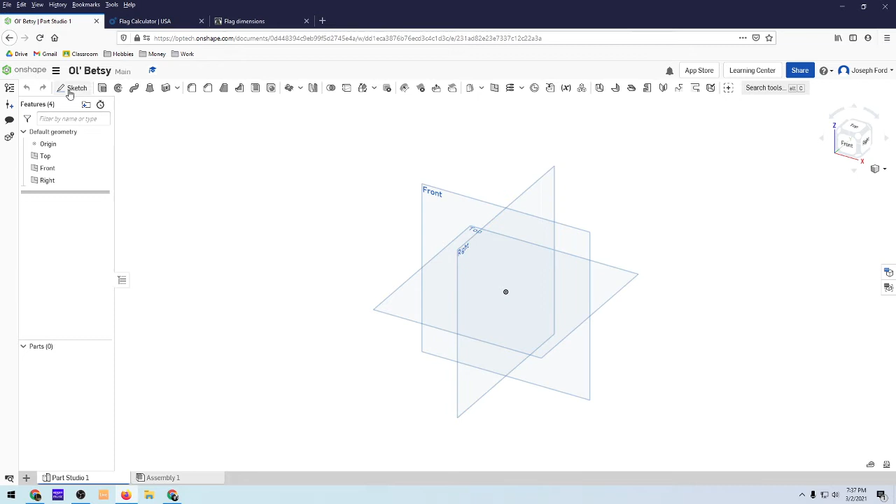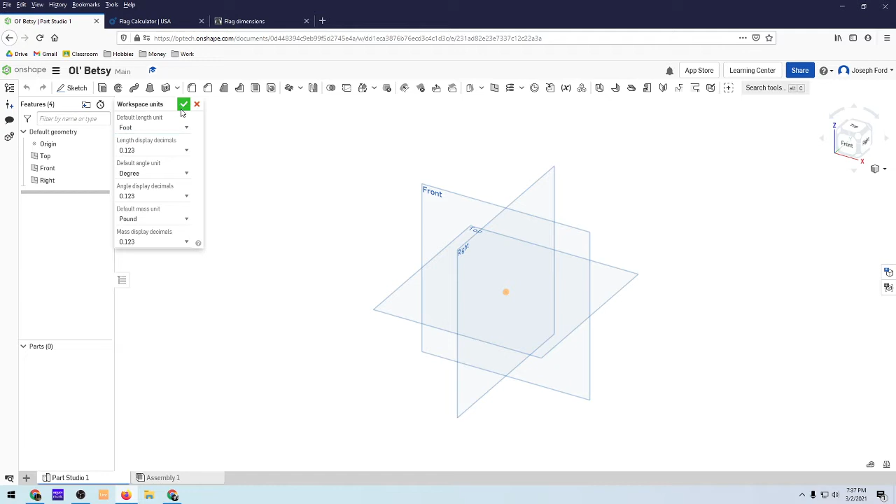Okay, so from here, first thing you want to do, because when you open up a part you're usually in inches, go up to document menu, workspace units, and we're going to use foot as the default length. Check it off. So now we're in feet.

So click on sketch, click on front, and then we're going to go normal to this sketch. You can hit the N key, or just click over here to front, and it'll bring us right in. The first thing we want to do is make a rectangle. Hit the hotkey R for a center point rectangle, which starts with the center, so we want to go right into the origin.

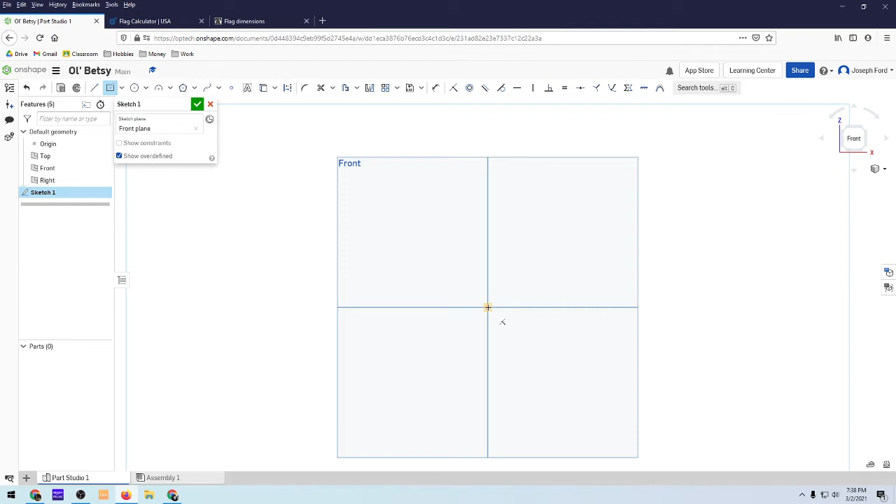Make sure that the origin has an orange box around it. Click on it, and then we're going to extend it out. The dimensions are going to be 20 by 38. So click on the D key for dimension. These are toggles, so you can click on and off. If it's on, I can dimension things. If it's off, I can't dimension anything.

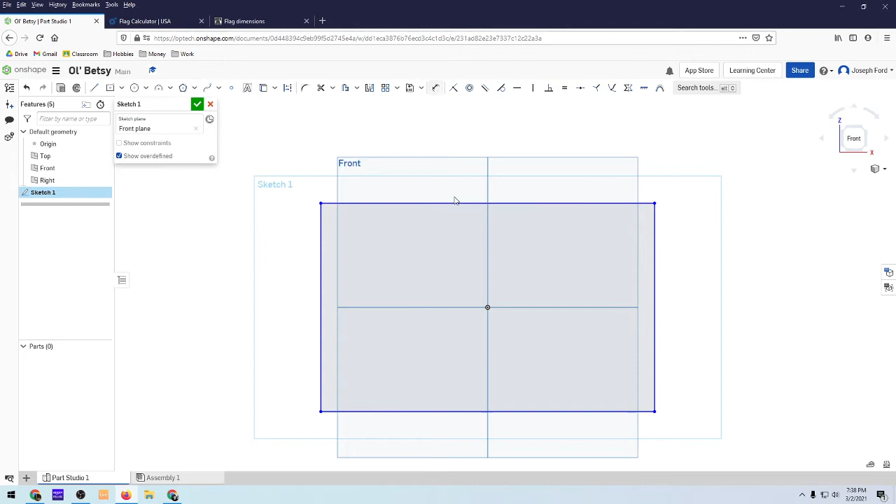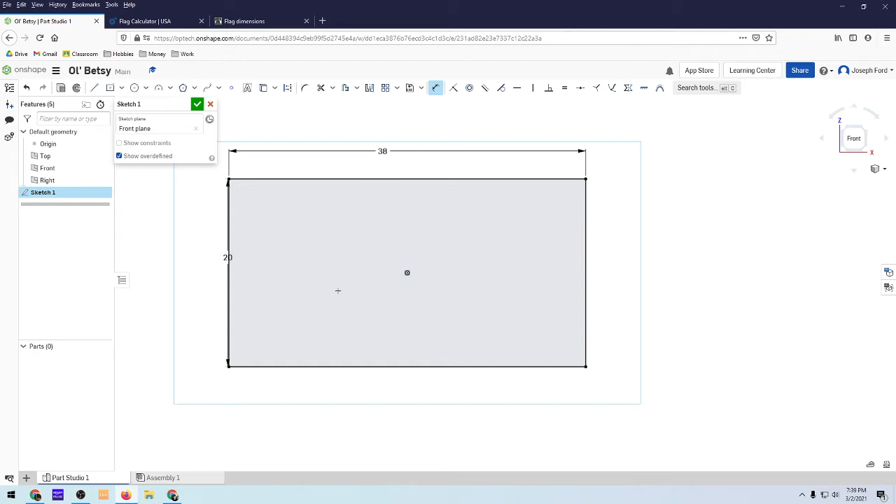So again, the hotkey is D, and it's going to be 20. Oops, and it looks like it's huge now. So zoom out, by 38. All right. So this is kind of where we're going to start.

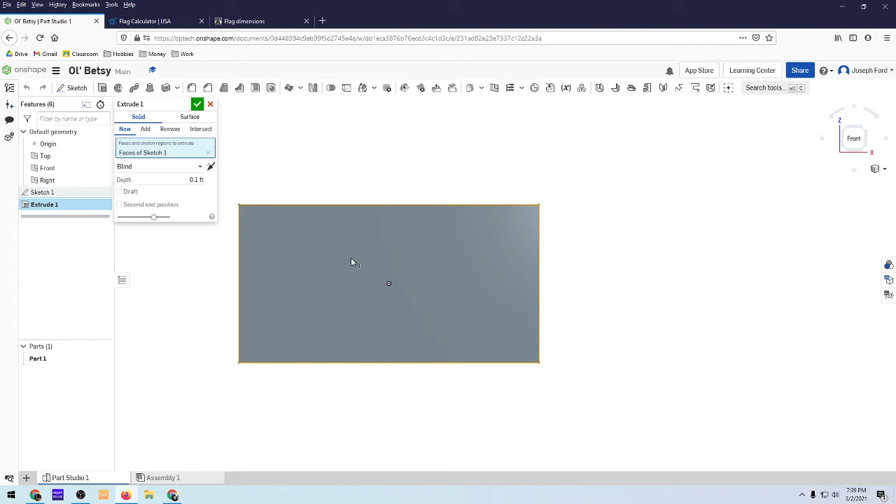So I'm going to extrude this out. Click on the extrude button. Whatever default depth is fine. 0.1 works, because we'll be building off of this. So 0.1, check. And now we can start with the blue space where all the stars are located.

So that's C by D. C is 10 feet 9 inches by 15 feet 2 inches. And so I'm going to click on sketch, and click on this here.

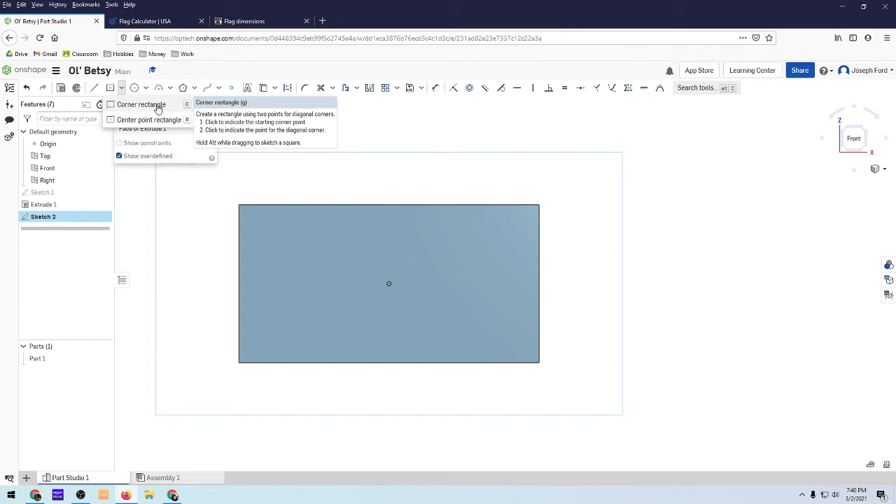And now I'm going to make a corner rectangle. To do that, I'll come over here where the center point rectangle is and click on this arrow. The corner point rectangle has a hotkey of G, so in the future you can just press G to trigger it. Click on it, and now it's opened up.

From here, I'm going to go to this corner, click it, and then come down and click it again. I don't have to worry about the feet, because I'm going to dimension that out. Again, it's 10 feet 9 inches by 15 feet 2 inches. So D key for dimension.

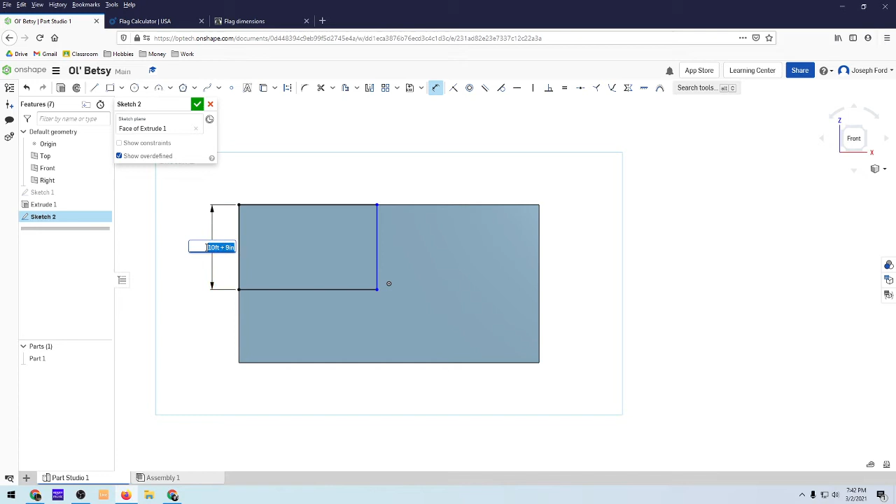Click over here, and 10 feet plus 9 inches. Okay, that's how you have to do it. So 10 feet and then plus the 9 inches. You have to use the addition symbol there.

And then dimension this one. I believe this was 15 feet plus 2 inches. Let me just check. 10 feet 9, 15, 2. Okay.

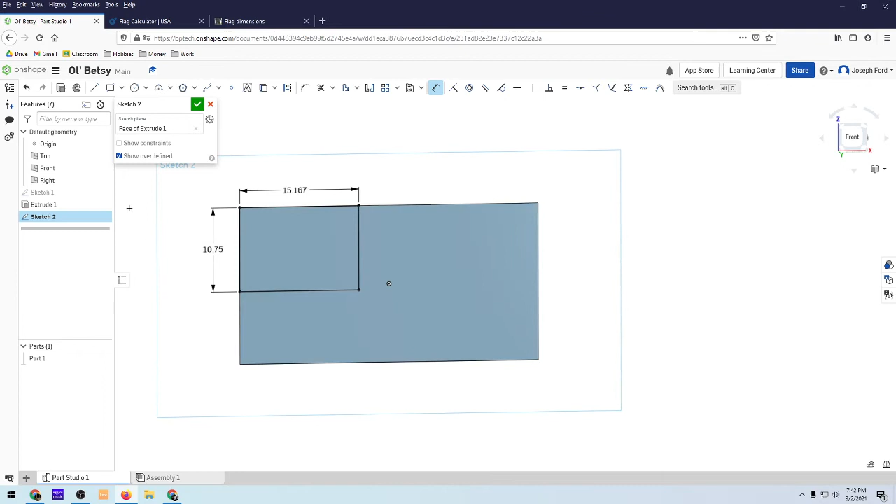Okay, so now I'm going to extrude this box up. Click on extrude. Again, the default is fine on this. Although what I may want to do is increase it a little bit, because I'm going to have some stripes that are going to be lifted up here.

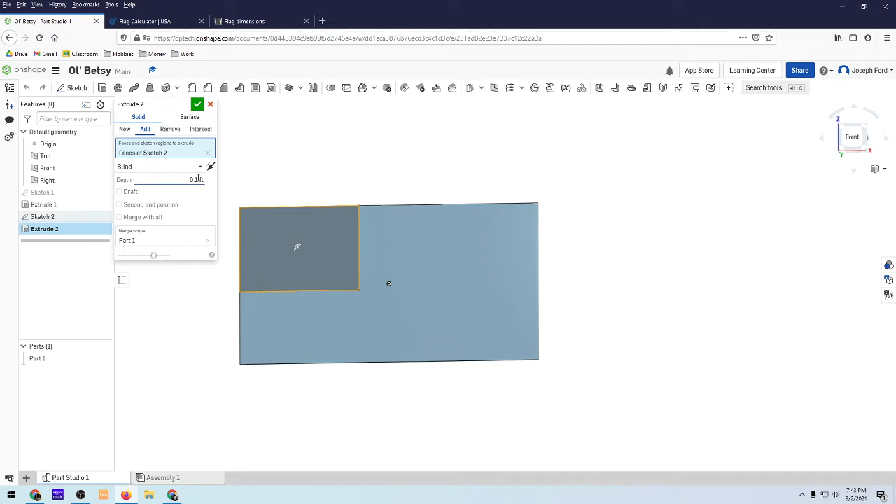Or no, they could be the same level, so that's fine. I'll just keep it 0.1. 0.1's fine. Check it off. All right, cool.

So now from here, I'm going to start putting in the stripes. So the stripes are going to be a bunch of rectangles, right? So I'm going to have 1, 2, 3, 4, 5, 6, 7 red stripes. Okay. And the width of those is 1 foot 6 inches.

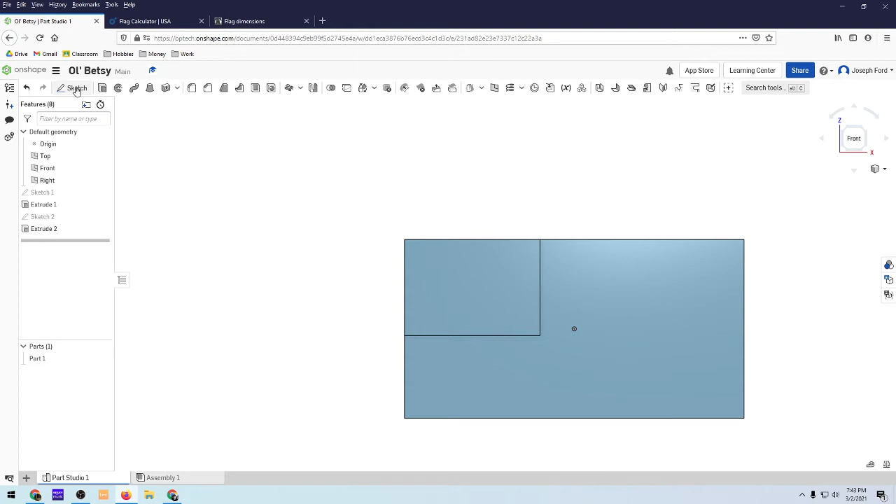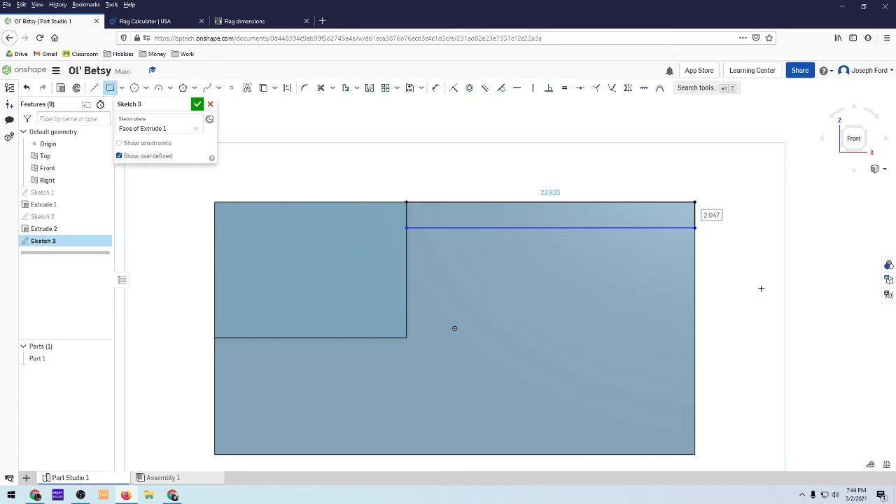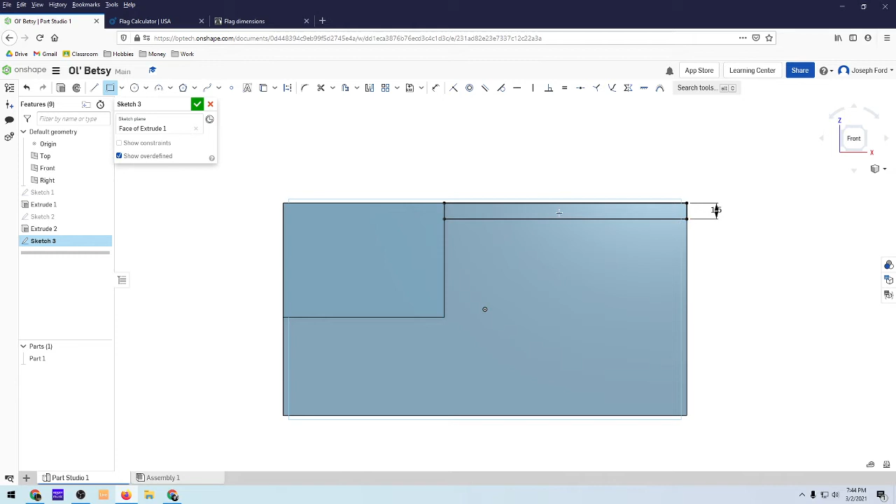So I'm gonna just create a sketch, click in here, and I'm gonna go back to that corner rectangle. So click on the corner rectangle, start at the corner here, and then I'm gonna go to this line there, and it is 1 foot 6 inches. Yes. So dimension this to 1 foot plus 6 inches. And then I'm going to create another one. But this time I'm not going right to here because these are going to be lifted up. I'm only doing the red stripes right now.

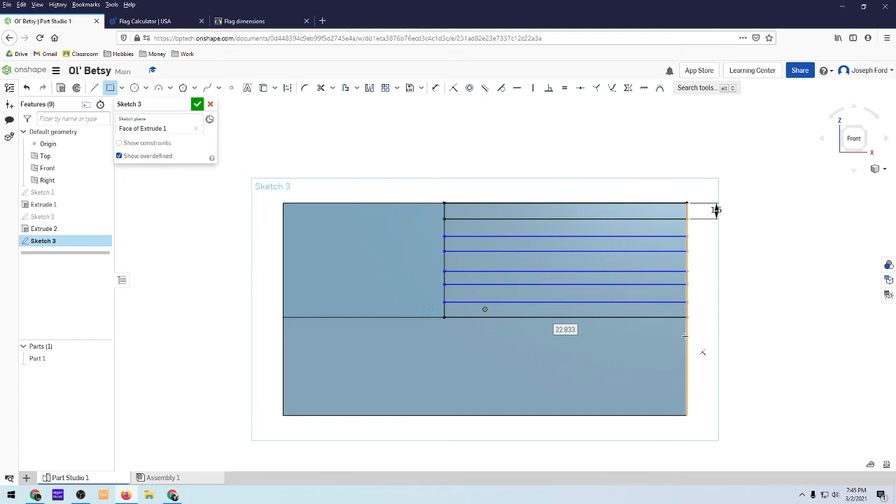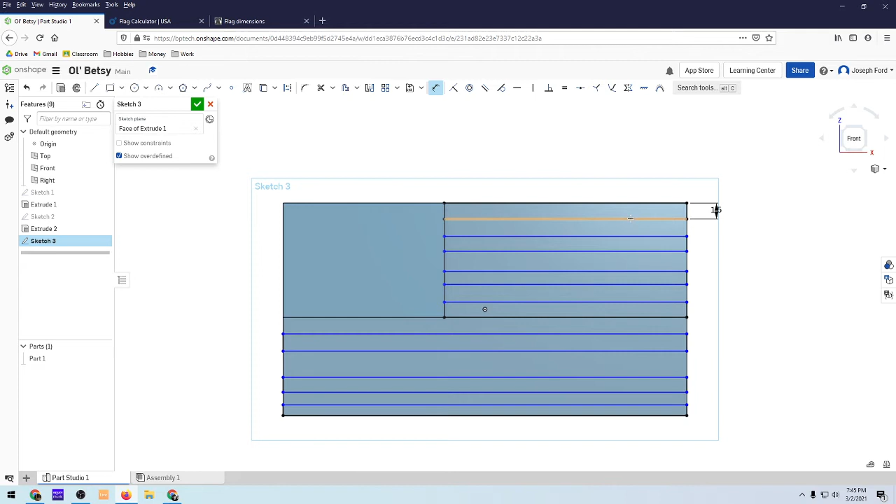One, 2, 3. Let me just check. Okay. 4. 5. 6. 7. And it's okay if they're not perfect right now, because we're going to make them perfect now. So dimension, and this is going to be, you guessed it, 1.5. So you could do the 1 foot plus 6 inches, but just as easy doing 1.5, right?

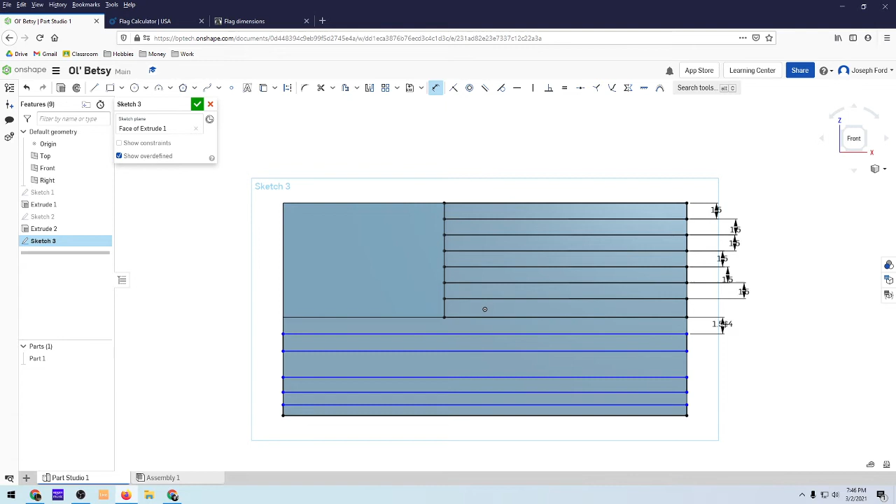1.5, and then I'm just going to keep going. 1.5. 1.5. This from here to here. 1.5. Here to here. 1.5. 1.5. Here to here. 1.5.

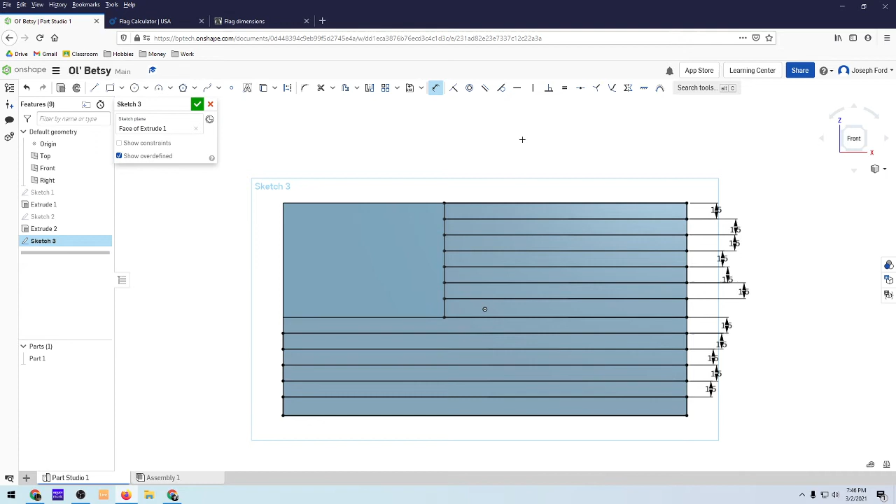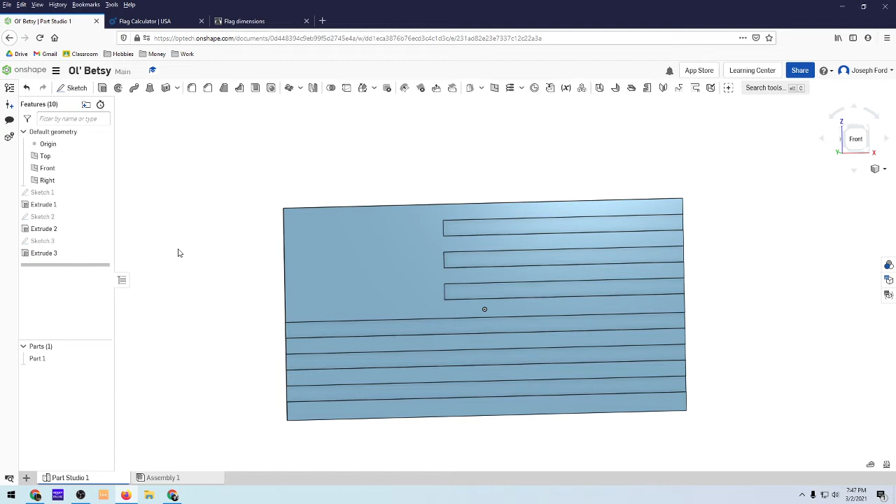1.5. All right, cool. So now once we have all of these, we can extrude these to 0.1 inches. And why does that look weird? Oh, that's why it looks weird. Okay, that's kind of what I was afraid of. Let's see. Yeah, that's what I was afraid of. Okay. All right, so we're gonna lift that up a little bit more than the blue square. So that's no harm, no foul. So double click back into your extrude, and I'm just gonna lift that up a tiny bit more. So 0.15. So that will create the separation that we need for that blue square.

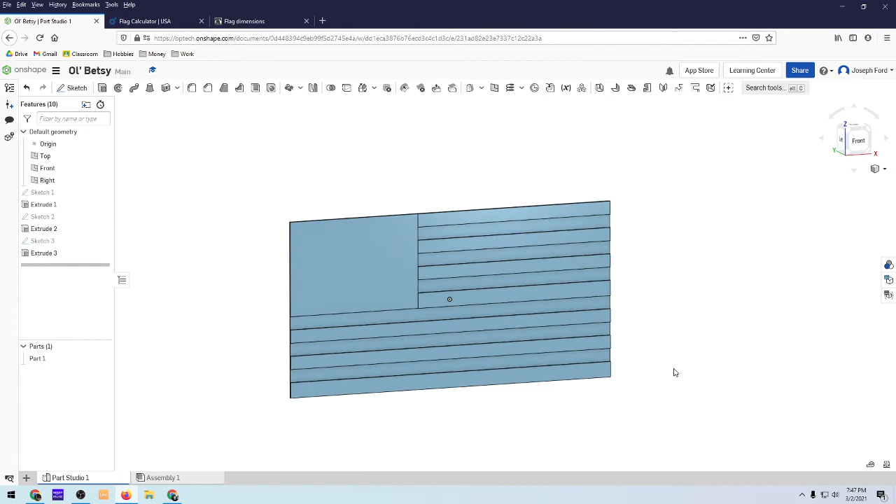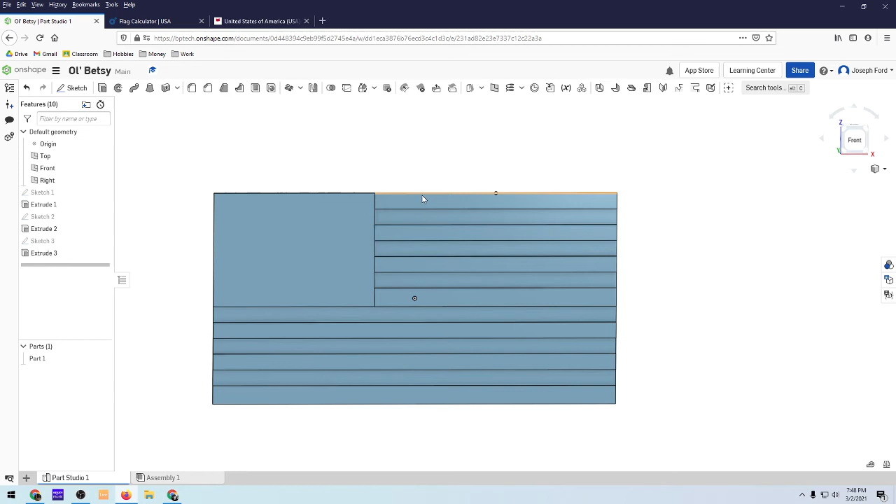So now we can start adding some color a little bit, just to have it start looking like a flag. So to get the exact colors of the flag, why not do that? So USA flag RGB. Okay, cool. So here we go. Yeah, let's try that. Let's see. Cool. Okay. So the hex numbers are here. So let's do that. So red, copy that, and so I'm gonna right click on extrude, add appearance to feature, and then double click down there, Control V, and check it off. So that's my red.

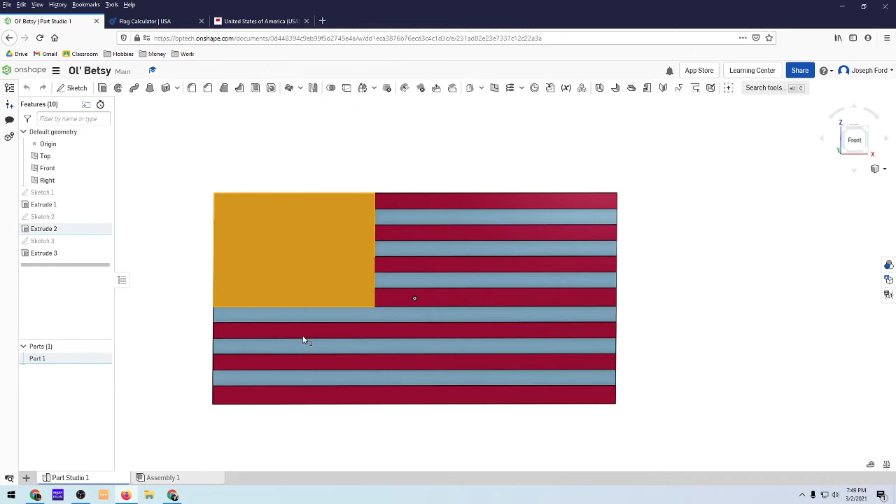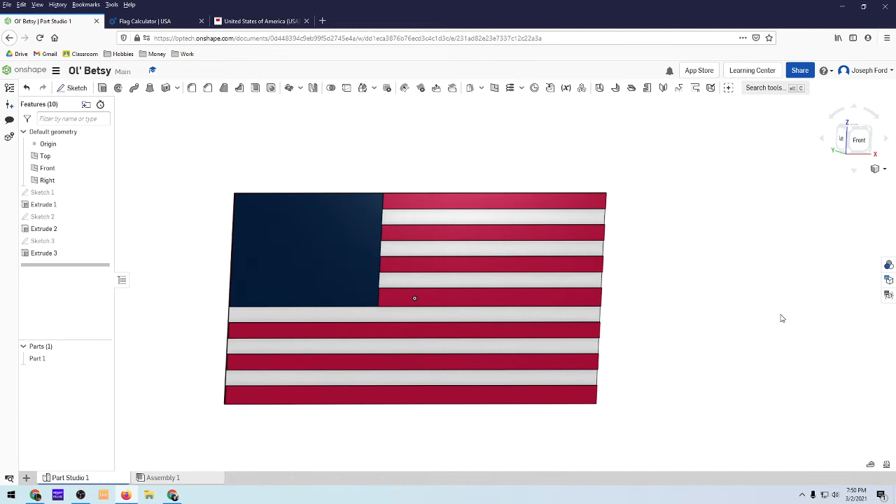Now I'm going to right click on this face, add appearance to face, go look up my blue, which is 041E42. Check that off, and then all of these, so add appearance to face, that's going to be FFFFF. And that wasn't right. I need 6 Fs. 1, 2, 3, 4, 5, 6. Check it off. All right. And then, oops. So right click on that, edit face appearance, and then you can actually go in and click these two to get all of them to be that white color. Very cool. So we're starting to look like a flag.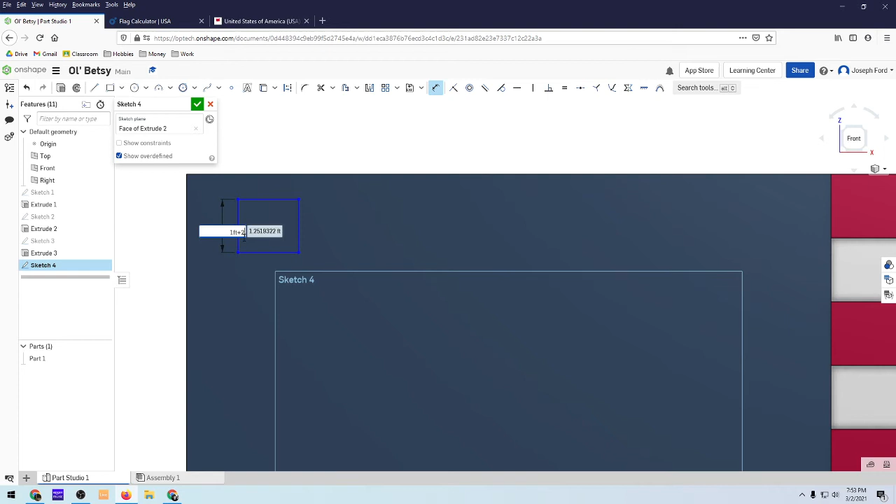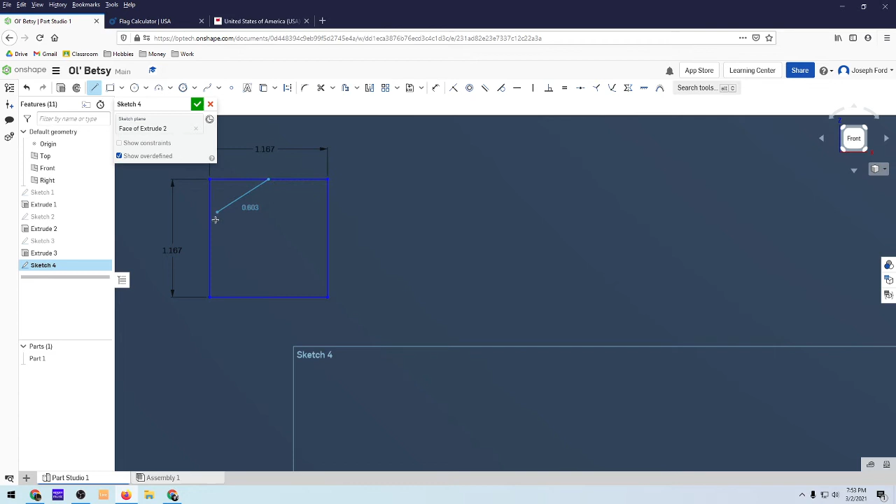So we know the square is 1 foot 2 inches, right? All right, so we're going to make a square. And it's going to be dimensioned, 1 foot plus 2 inches, 1 foot plus 2 inches. Okay, and we're gonna create a star. So from here, okay, we want it to be symmetrical.

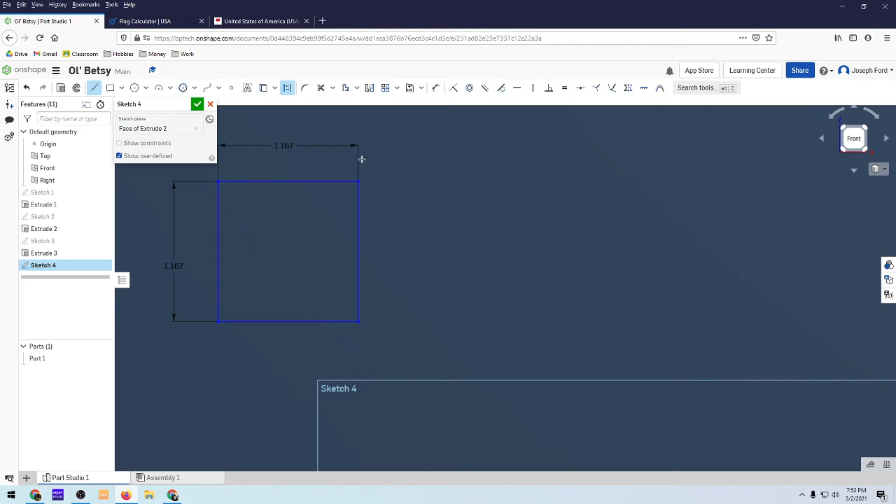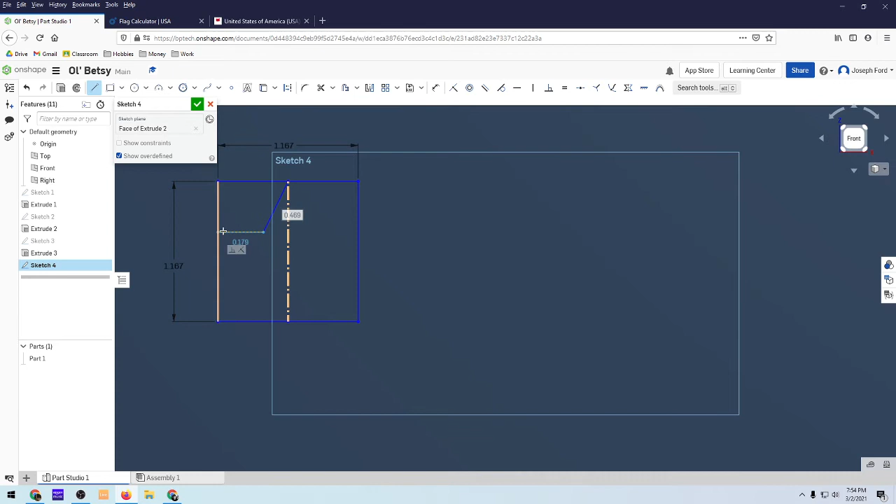So I'm going to create a line. So hit the L key, line, and then hit Q for construction. So L and then Q. And now we're going to go from the middle to the middle. Hit escape. So from here we're gonna create a star. So click on the line again, and now I'm gonna go here, make a horizontal line. Connect the dots there.

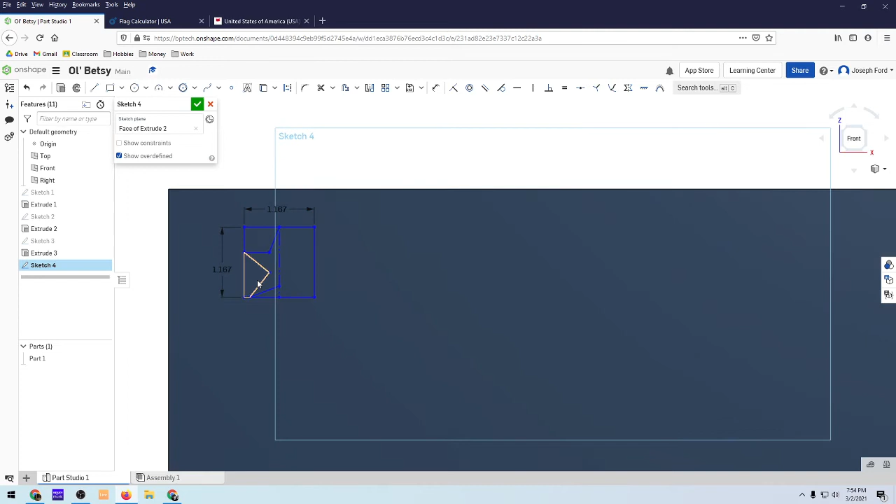Is that too much? That might be too much, yeah. All right, and then hit escape. So you might want to play around with this a little bit. Bring it in, bring it out, whatever you want to do. Again, it's not going to be perfect.

It'll be good enough. So with this, we're going to mirror it. Click on the mirror command. We're going to select this line, and then we're going to select all these entities.

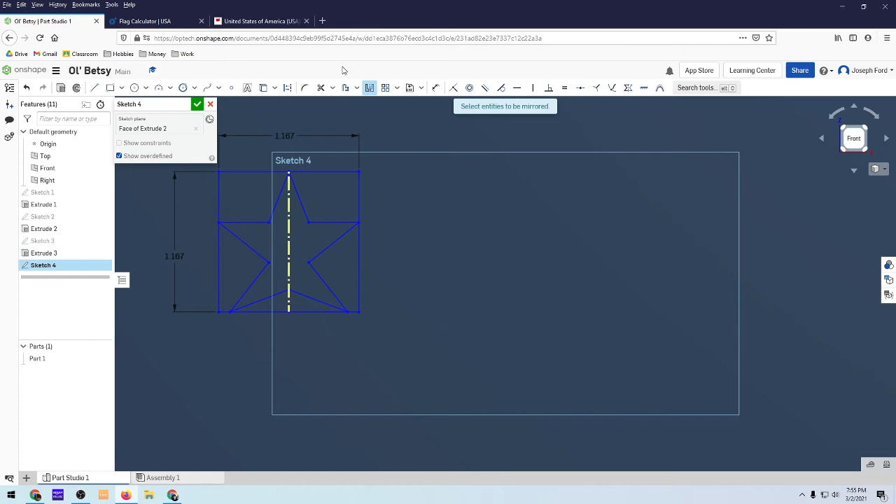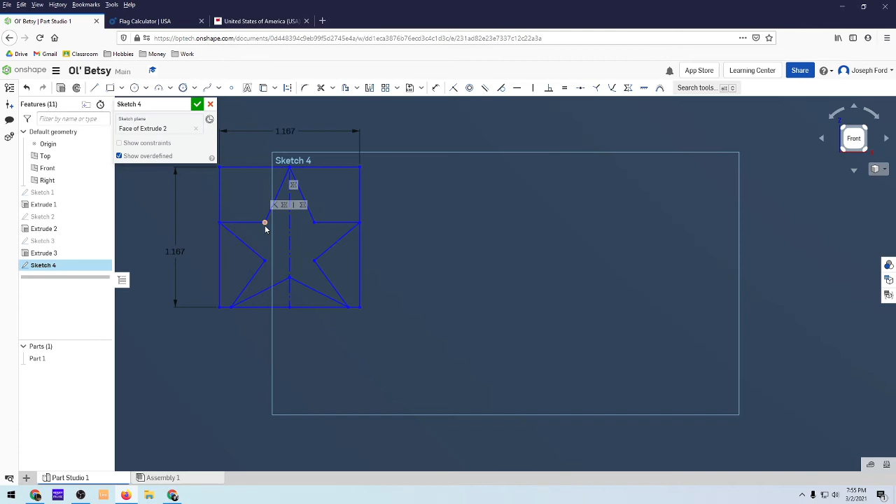And if that looks weird, which it kind of does, click out of the mirror. And then if you move this up, notice it also moves that up. So why does that look so weird? So kind of play around with it. That looks a little better. That doesn't look better. That looks like a tub star. Okay, all right, I'm gonna say that's as good as we're gonna get here.

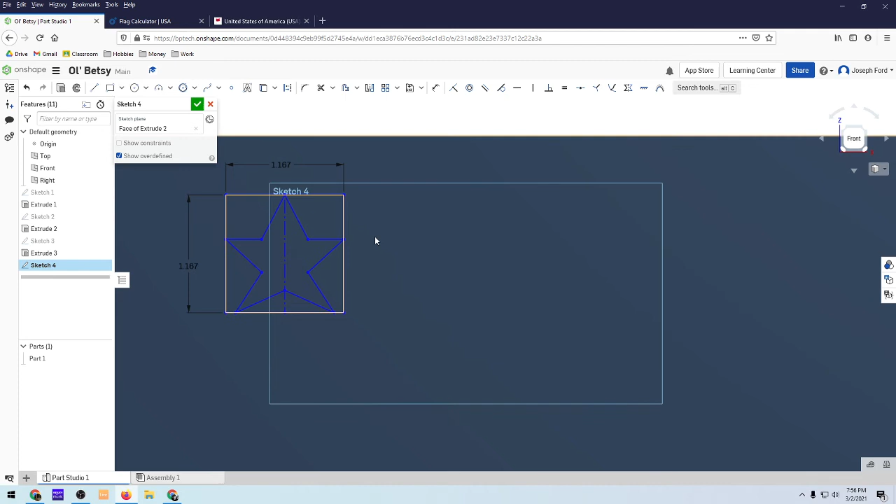All right, so now that we have one star, we have to make 50. So to do that, and to make your life easier, there's 1, 2, 3, 4, 5, 6, and then 1, 2, 3, 4, 5.

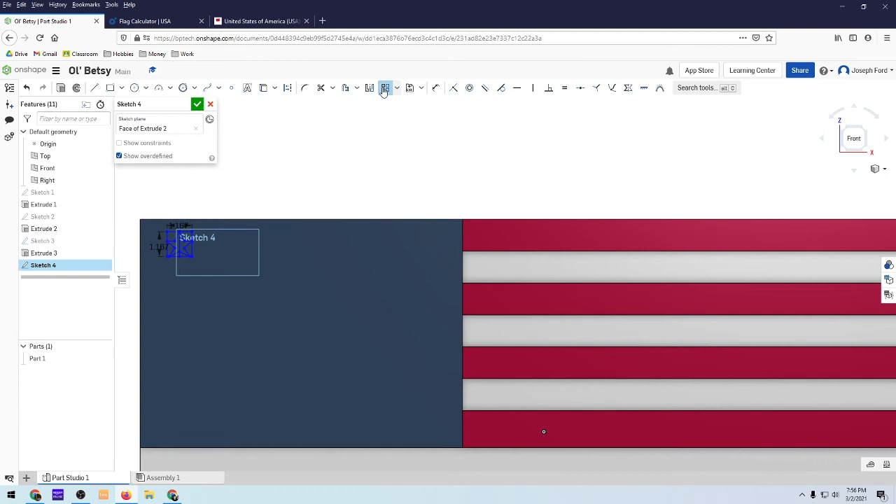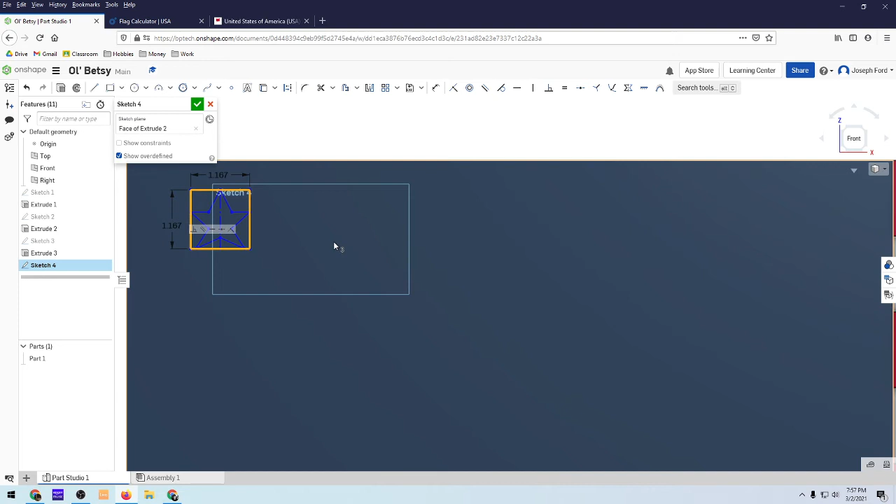So there's 6 on the top, and we're going to create a pattern, a linear pattern. So click over there for linear pattern, and then I'm going to select everything. Actually, before I do that, click on these - click on your square. Click on the hotkey Q. Now those are construction. Good.

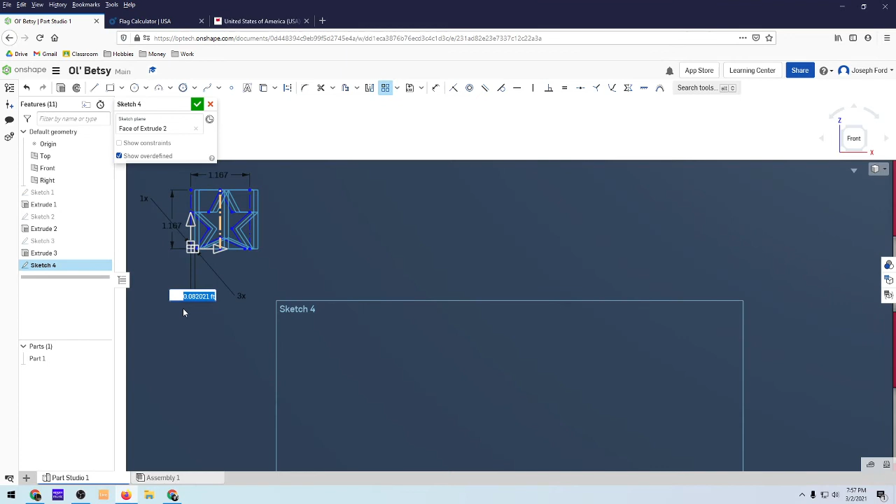Click on linear pattern, and then box in that whole thing. From here, we're going to go back to that dimension, which is F, F, F, F, F, but F is going to be times 2. So it's going to be 2 feet 6 inches, so 2.5. And there are 6. And we're good.

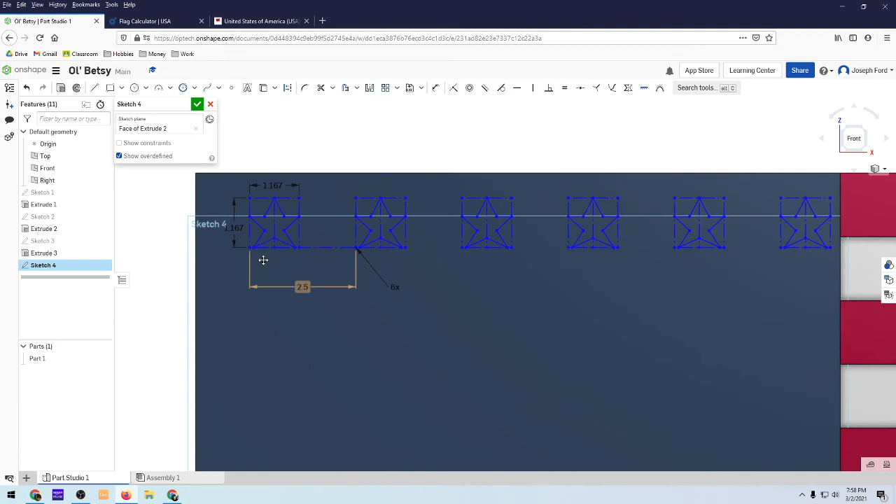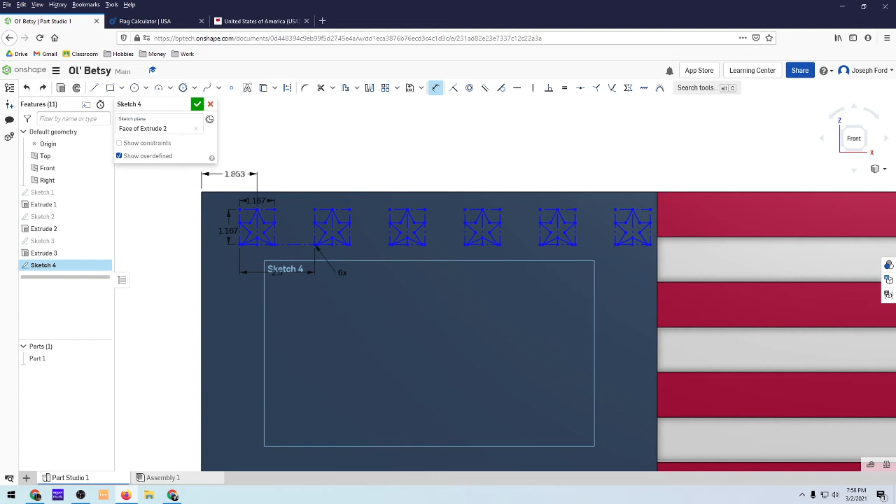Cool, so all right, so now we're going to kind of move this over though. Whoa, didn't want to do that. Okay, all right, so select all of it. Or wait. All right, so dimension from here to here is 1 foot plus 3 inches.

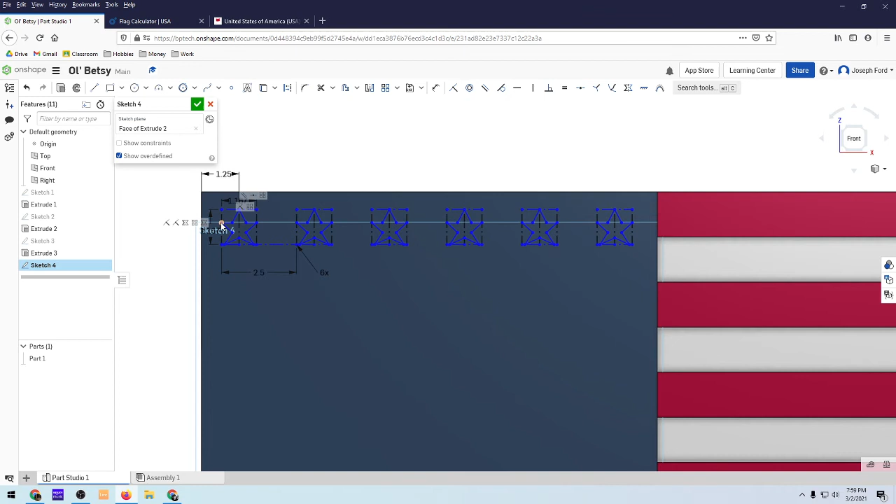And what about the top? It doesn't really tell you. I would assume it would be E, I hope. But I'm not certain, because it looks like it makes the dimension from down below. Okay, so that's fine, we'll just do that. So dimension this point to the bottom here, that is E, which is 1 foot exactly.

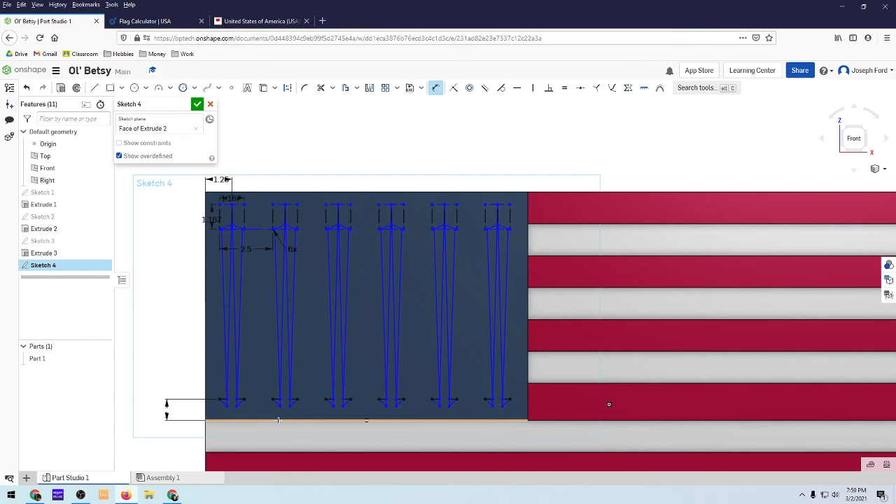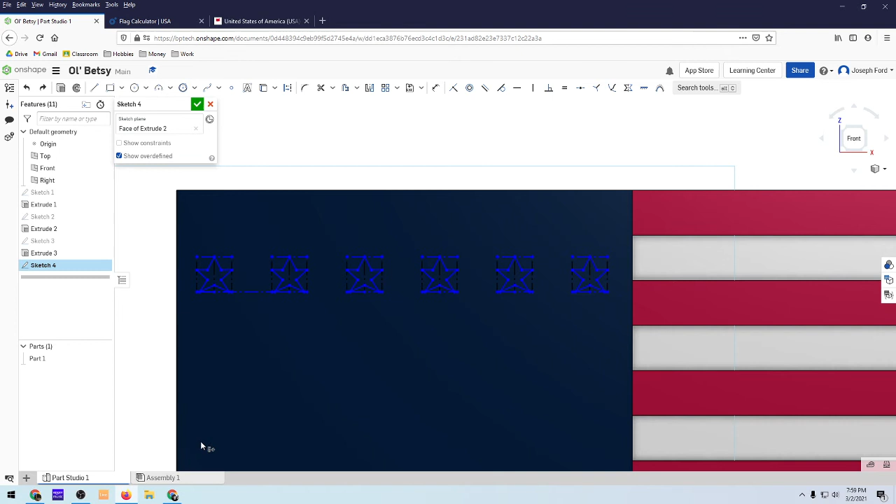Oh no, okay, that is not what we want. Yeah, let's try to move all of these downward. Okay cool, that's a little better. All right, keep moving it down. And now it won't let us. Why? All right.

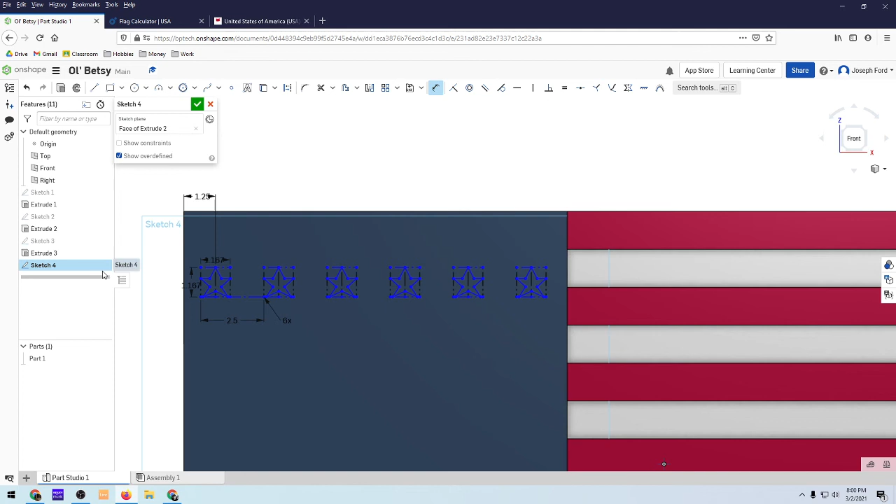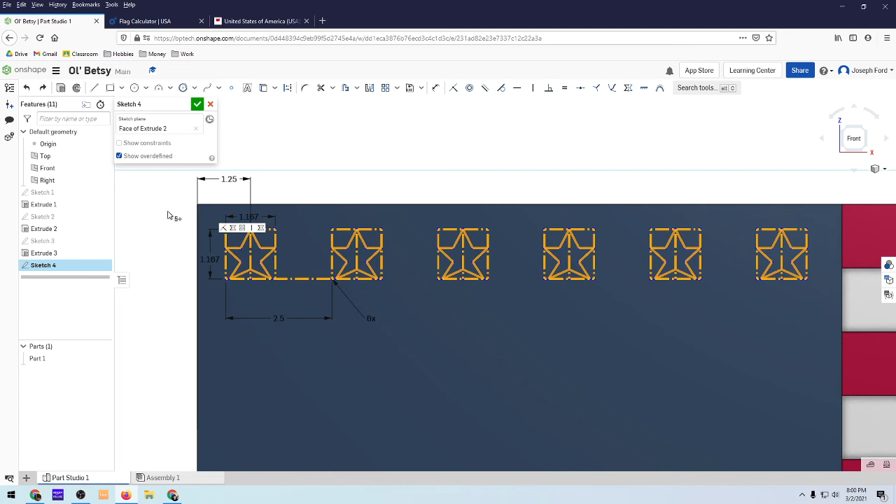Okay, we're just gonna keep it as is. We're just gonna move this up a little bit. If it lets us, and it won't. I'm trying to click and drag here, but it won't let us. All right, well, we're gonna call it as it is. It's fine.

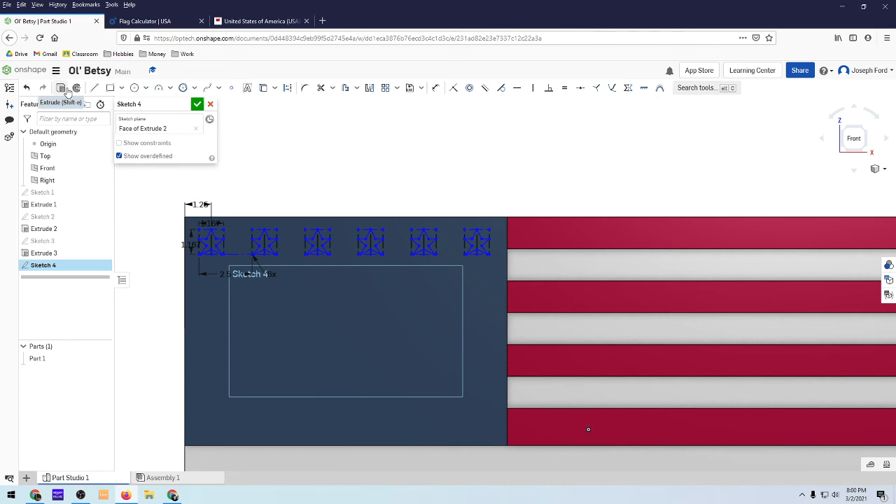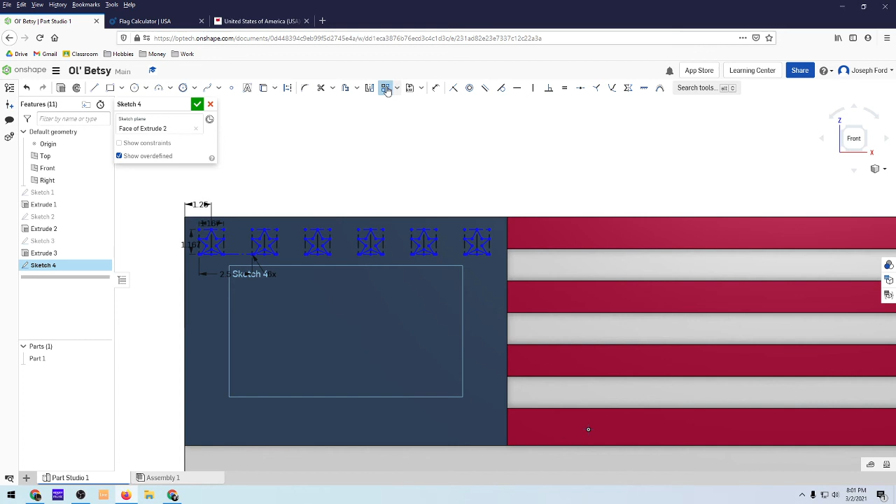So from there, we have how many of those? We have 1, 2, 3, 4, 5. So we need to make 1, 2, 3, 4 more of those. So let's go back to the linear pattern, and we're going to select all of these.

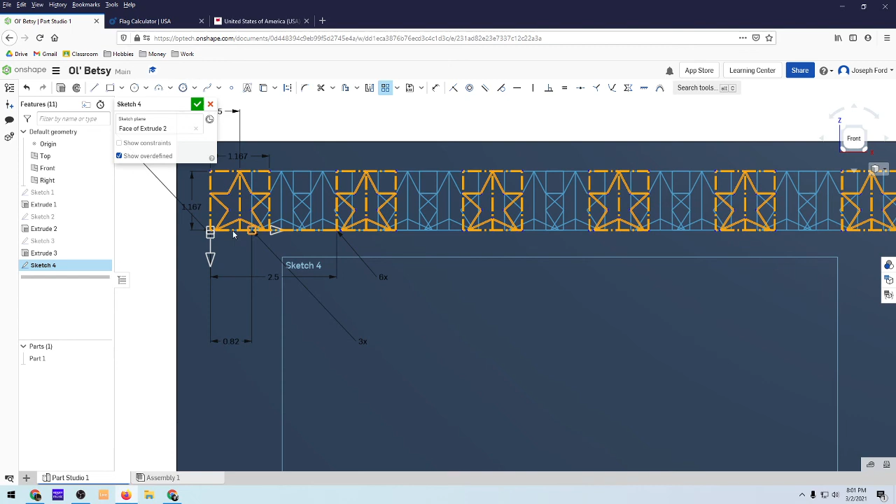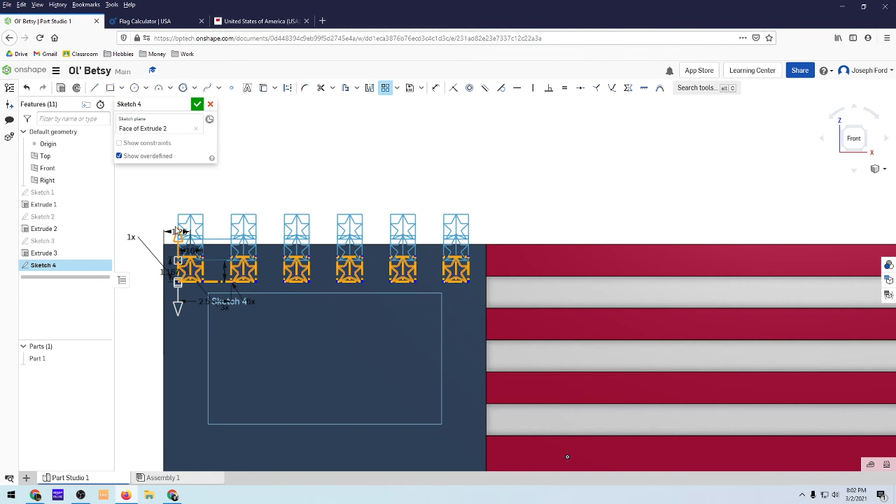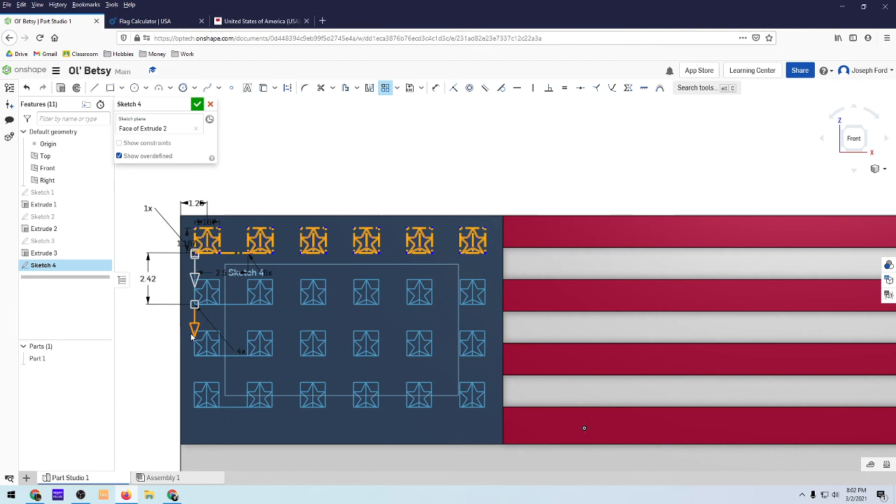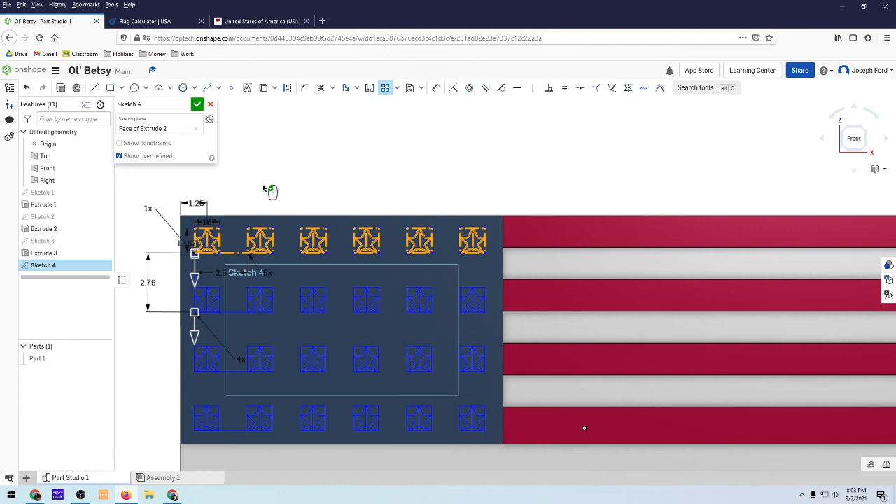You know what, we're gonna do this kinda not perfect, but perfect enough. I'm just dragging it around here. Okay, so at this point, if you are lost with this whole star thing, I suggest you come into the Google Meet and ask me some questions, because this is tricky. This is the tricky part. You could do circles, you could do something easier. This is kind of tricky. Okay, so click outside. And we're good, okay.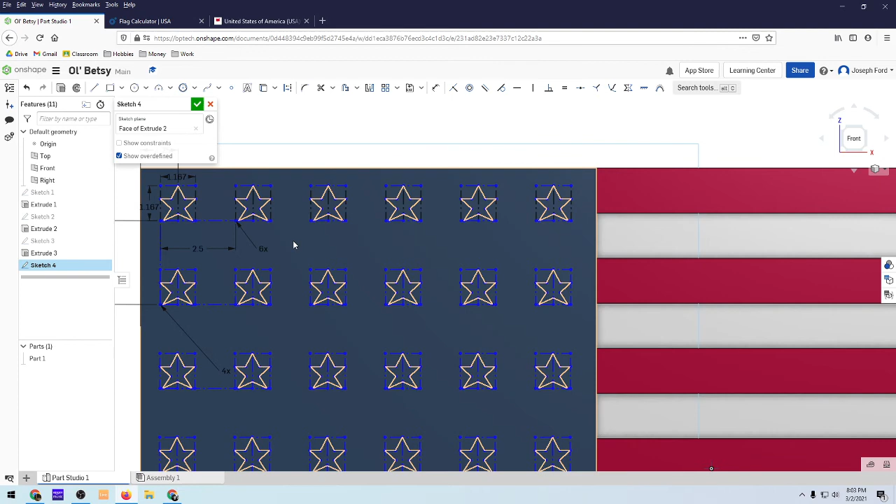So now we have to create some more stars, and we need to create the ones in the middle. So 1, 2, 3, 4. Okay, so they're going to go here. 1, 2, 3, 4, 5.

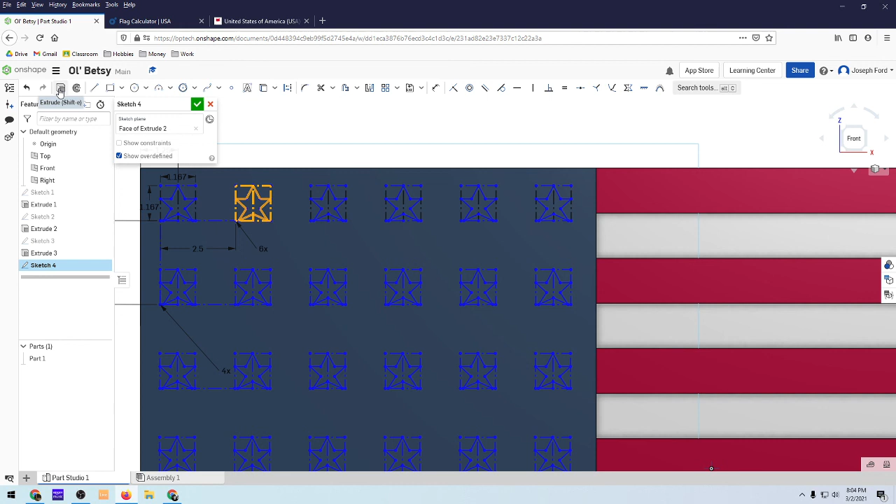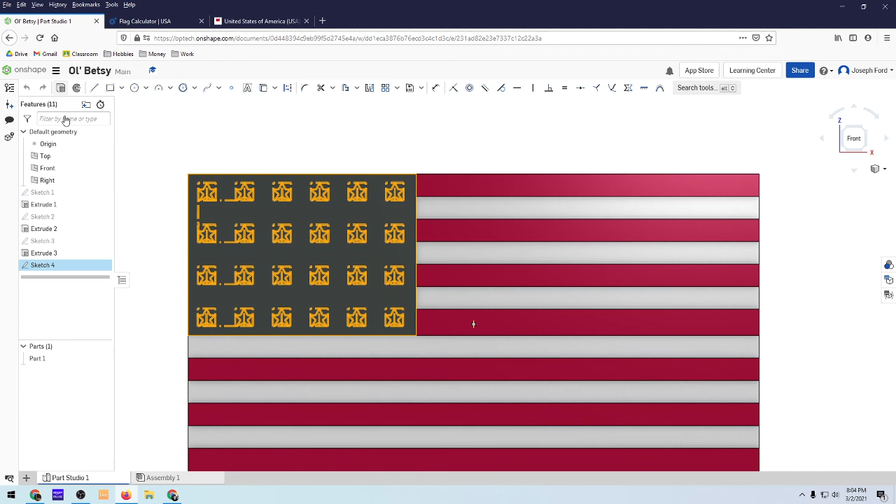I'm going to copy this, so Control C to copy it. But I'm gonna save it for another sketch, so that's fine, because we got a lot going on in this sketch. So what I'm going to do is hit the extrude key. So double click on extrude and then click on extrude. And 0.1's good.

So that's pretty cool. And now I'm going to go into another sketch, click on this again, and I'm going to hit Control V, and that's bringing in that star that I just dropped. Why is it doing this? Okay, click on this arrow, move it over. All right.

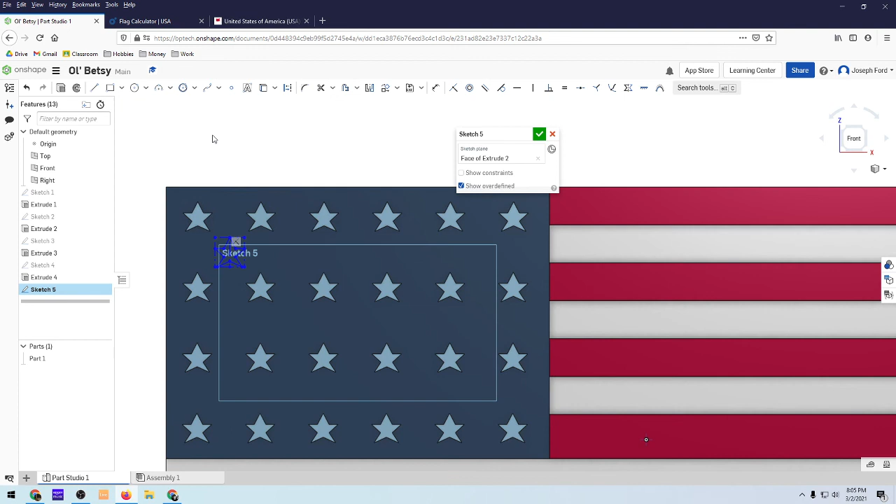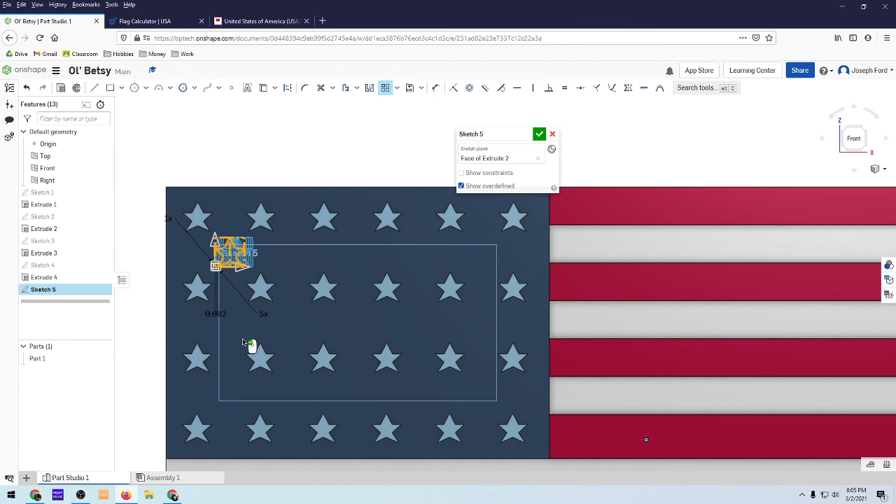Okay, so now I am going to do the same thing as I did before, right? I'm going to create a pattern. So highlight those, create a pattern. Where's the pattern? There we are. Linear pattern, and this is going to be 5 times. And they are going to be 1 - what was it again? 1, 3, yes, 1, oops.

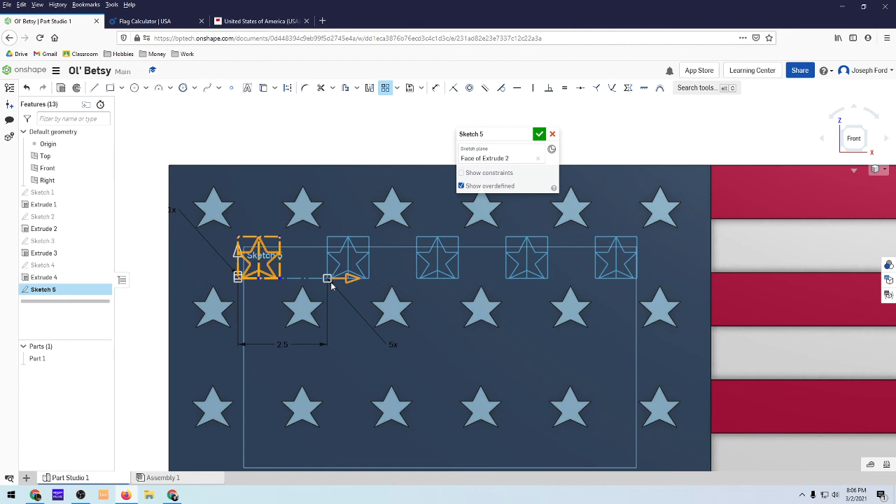1 foot plus 3 inches. And that's not right, it's 2 feet. I did this before, and 2.5 feet. And that looks beautiful.

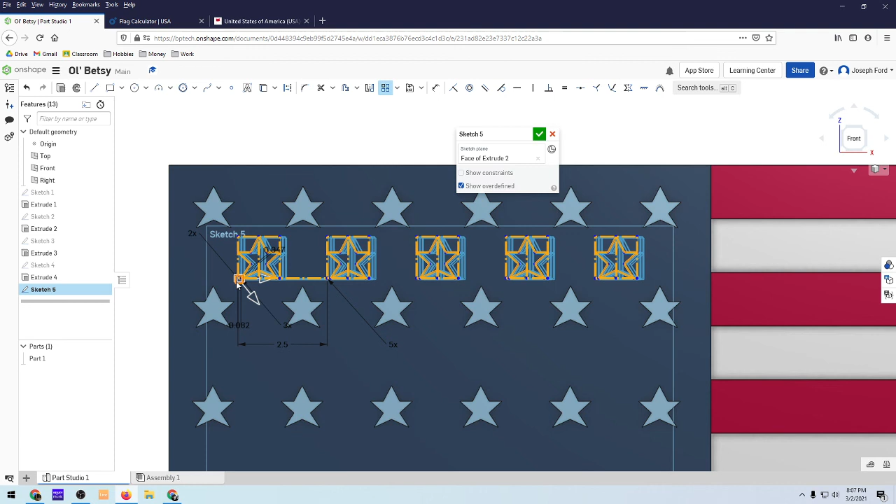Check out here, check again. And then I'm going to do linear pattern again, and I'm going to select all of those, and I'm going to go downward. And what the heck? Downward. And there's going to be 3 of these.